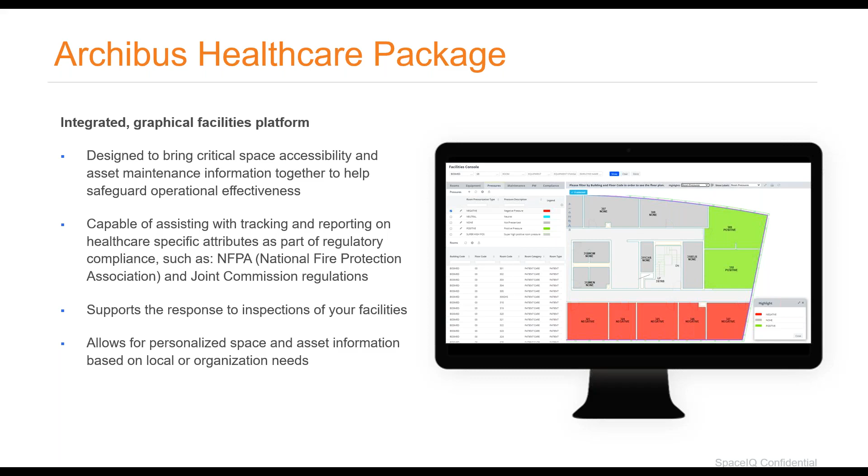What's in it for you? So bringing what I've mentioned together, this really puts into perspective the savings that we intend to deliver to the healthcare facility, and the revenue that the facility needs to maintain in order to operate well.

In terms of savings, we talk about operational efficiency or effectiveness in maintenance operations, making sure those run smoothly to maintain or reduce operational costs. I mentioned complying with regulations, saving on compliance-related costs, and lowering the risk of fines.

On the revenue side, I mentioned the use of space, making sure spaces are being utilized and patients can actually have access to the space they need when they need it, so those expensive space resources are used by patients when needed, translating to the ability to offer great patient care. If maintenance operations are handled effectively and balanced, rooms are ready when they need to be used.

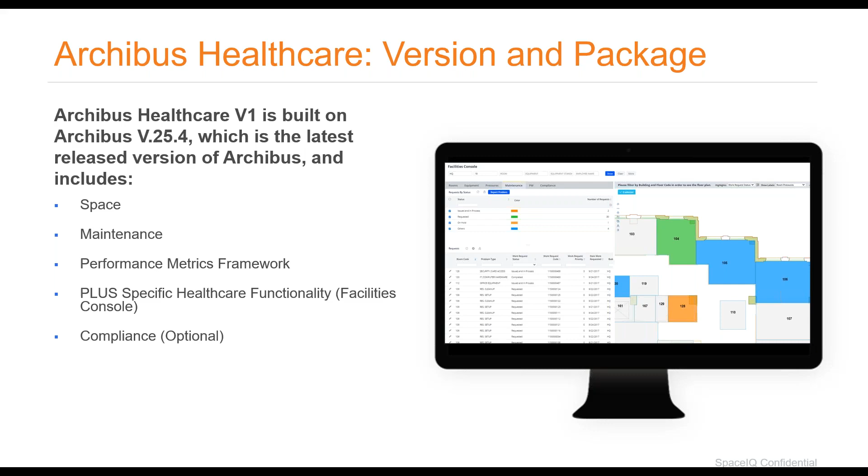I'll dive a little deeper into the facility console, where we allow the facility manager or compliance manager to track healthcare specific attributes. Just to name a few here, I won't list them all, but room pressure tends to be a very important one for compliance.

Occupancy room flag or occupancy status of rooms, secure rooms, licensed beds, I mentioned the bed count of rooms or capacity of rooms in terms of beds, biomedical waste locations, and where all that can be visualized in the healthcare facility floor plans.

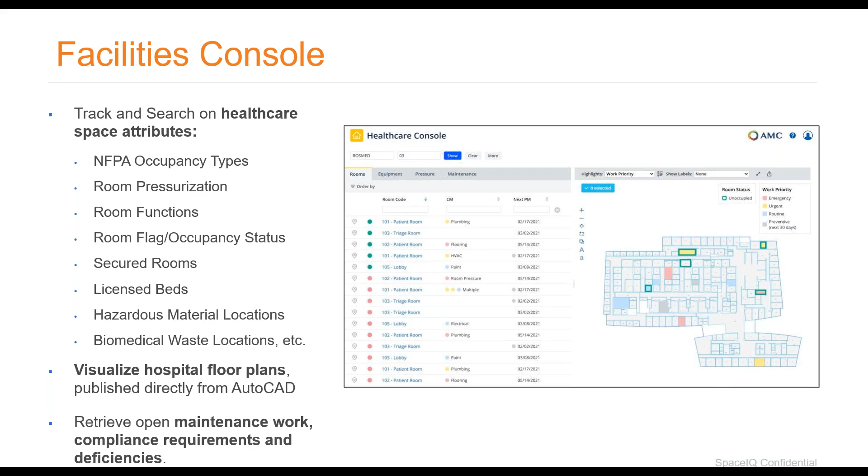Highlights are important, so visually reporting on attributes such as pressure, the National Fire Protection Association - a US-specific agency or association for fire protection, which is very important - fire zones in hospitals, room functions and occupancy types. Also being able to report or highlight corrective and preventive maintenance work.

And where deficiencies are, the ability to also display fire and safety assets on the floor plan and actually move them around, drag and drop to different locations so the visual representation reflects the reality of the situation. And of course, being able to export all of that to reports when you need to take the information with you.

Some examples of highlights, and I'll actually show this in a video. My colleague Octavian Vlad in the product group has been working very hard specifically on this package, and he's helped put together this presentation and the video I'll show in a little bit.

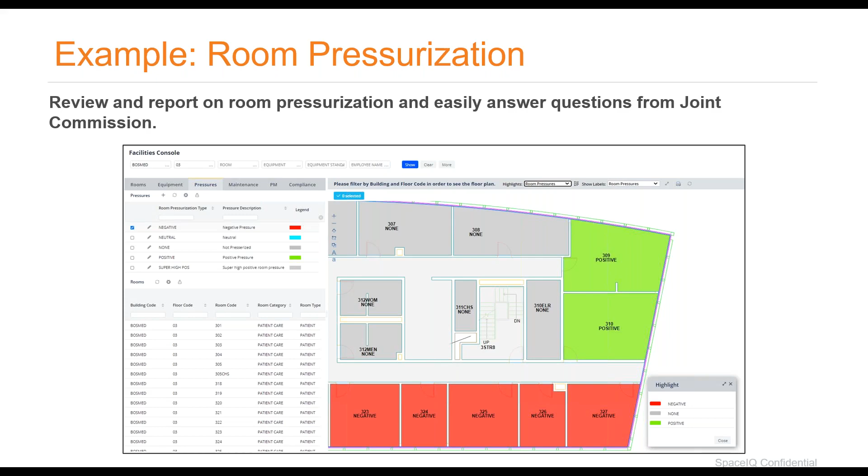Access to work, so being able to highlight and see accessible rooms and work pending in order to plan and optimize that maintenance work. I want to be able to see when I can get into rooms, plan the routes, and get the work taken care of that needs to be done for the facility to run optimally.

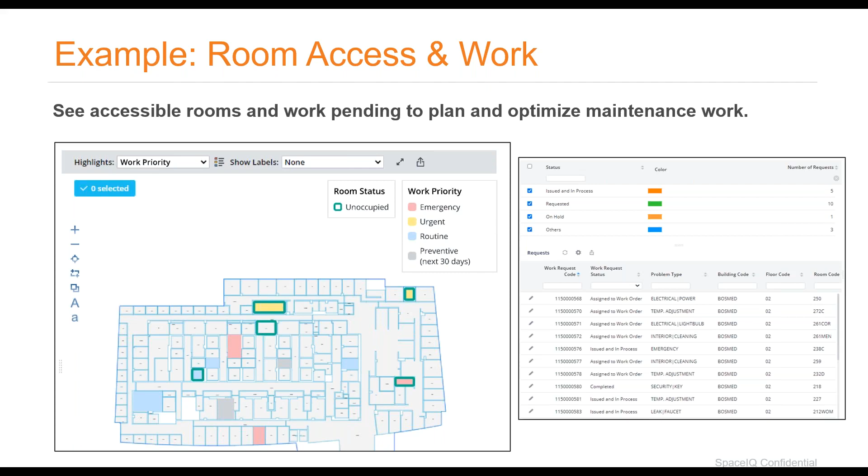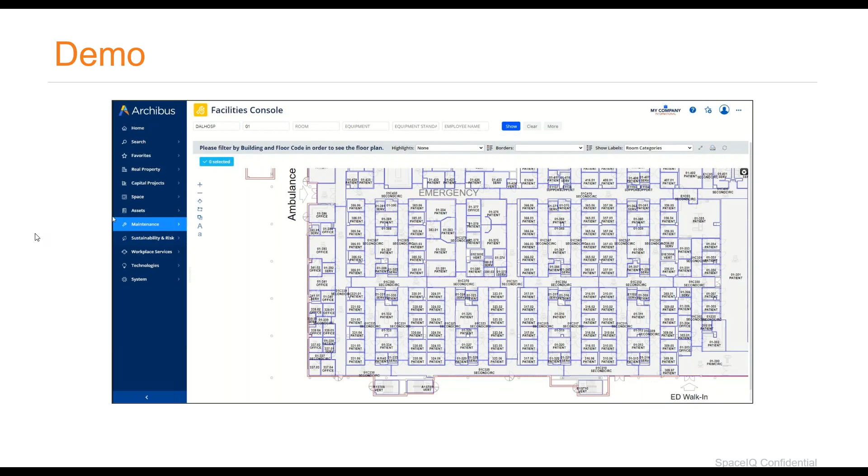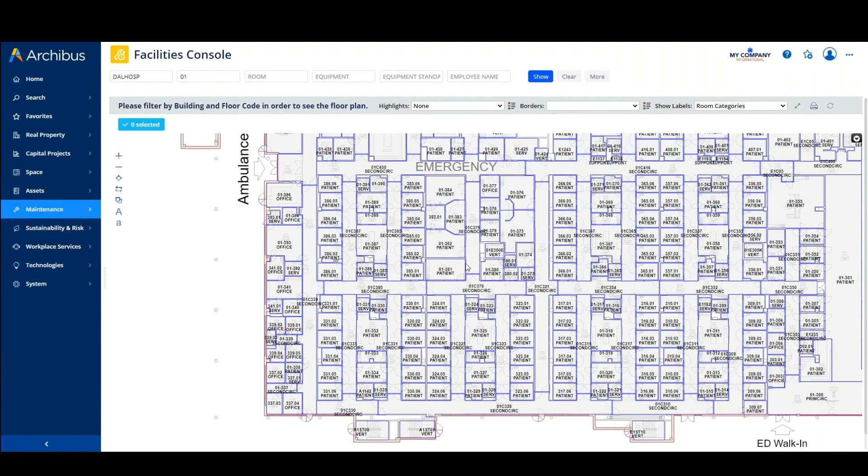With that, I'll show a brief demonstration of all of that in the facility console. So here's a view of what we're building now, and this is an example of a healthcare facility floor plan. Notice all of the healthcare-specific highlights that this can show.

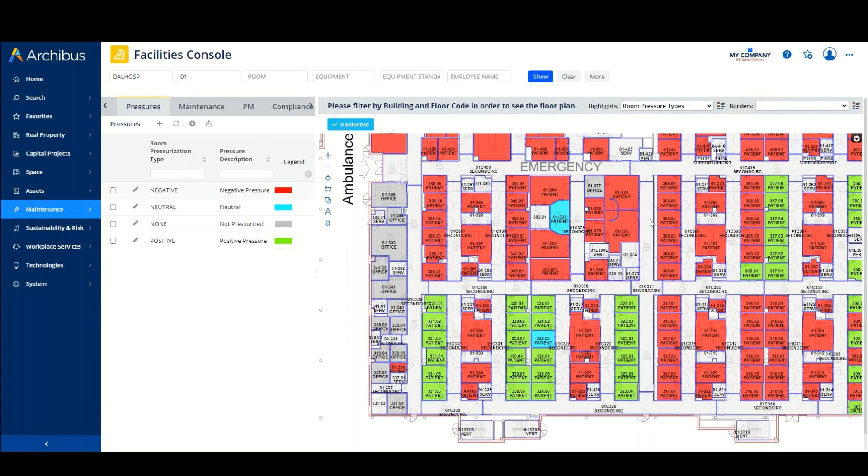For example, this is room pressure types, where you can report on negative, neutral, or positive pressure rooms, and the user can adjust the colors and presentation of that pressure. On the left-hand side, you can see the different categories that can be adjusted or expanded, along with the ability to adjust the colors of each, so that operating rooms are kept at positive pressure and other rooms, such as waiting rooms, are kept at negative pressure. It's very important to be able to maintain and even switch those pressures when appropriate.

Another big one is fire protection. Most rooms should have partial or full sprinkler coverage, and that's really important in many regulatory environments to be able to report on.

Occupancy types are again specific to the healthcare world, where we can report on healthcare, business, or ambulatory areas. I mentioned licensed beds before, so being able to define and report on the quantity of beds in each room.

And the list goes on. I think I'll take it a little bit farther - secured rooms, for example. These are all adjustable, but again, good healthcare-specific reporting for regulatory bodies.

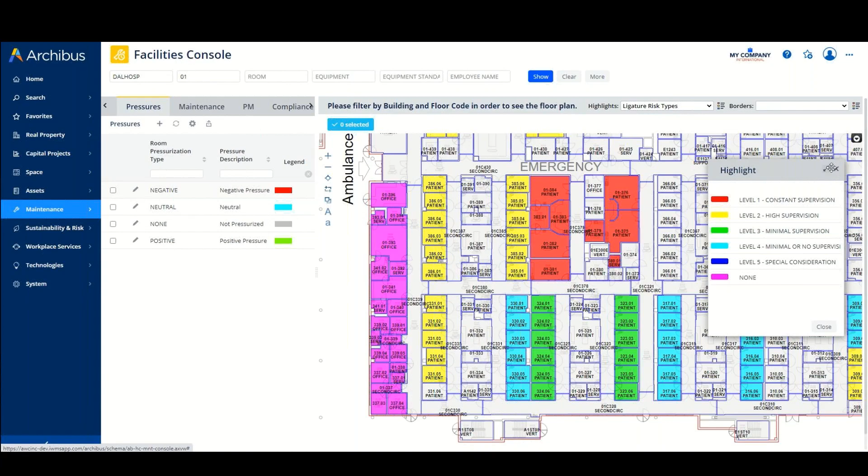I think next we'll get into zones of care as well. What we've heard in the healthcare world is that it's important to really define and report on those zones, whether it's entities published on the floor plan that we can show by turning the asset background layers on and off, or even defining those rooms in the zones. There are ways that Archibus can help manage and report on those zones of care.

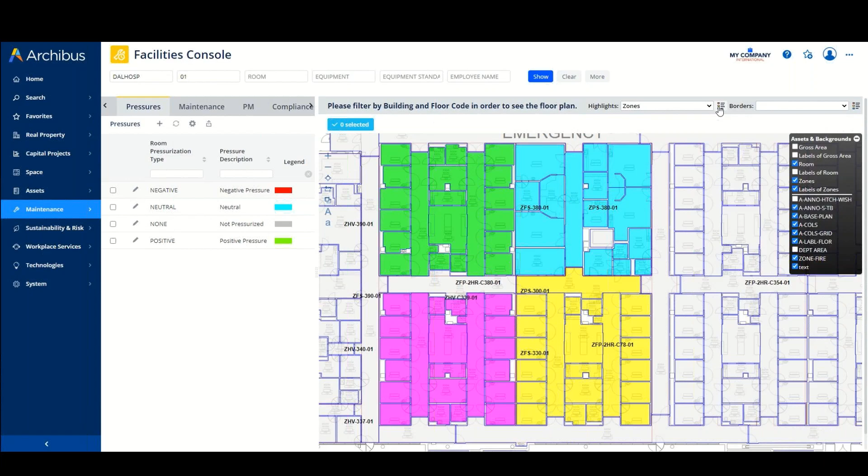I believe next we'll go into some of the tabs along the left-hand portion that bring the space side together with the maintenance side. So here on the maintenance tab, you have the ability to see what's going on the floor with respect to open work.

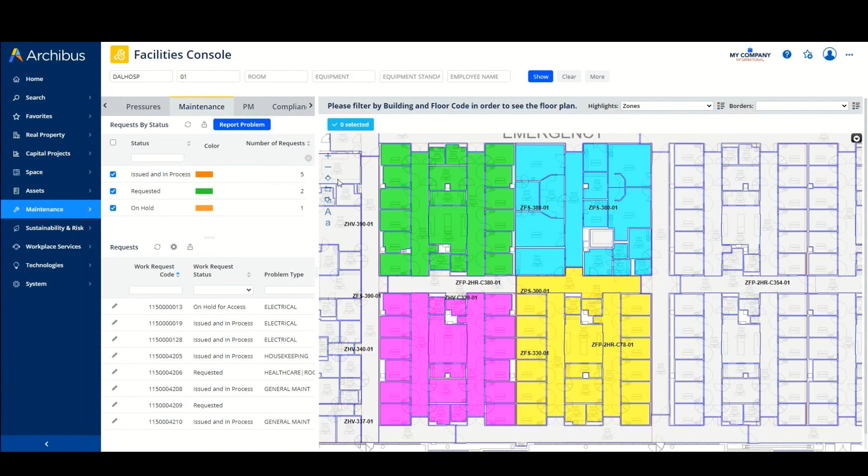Here the highlights can match what we're seeing in terms of work that's open or being performed on the floor. So here we have some work that's issued, some work that's on hold, and the locations of that work.

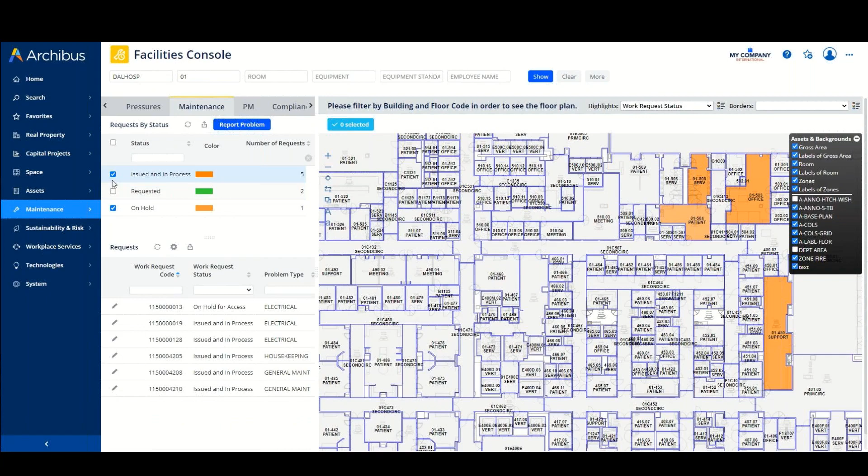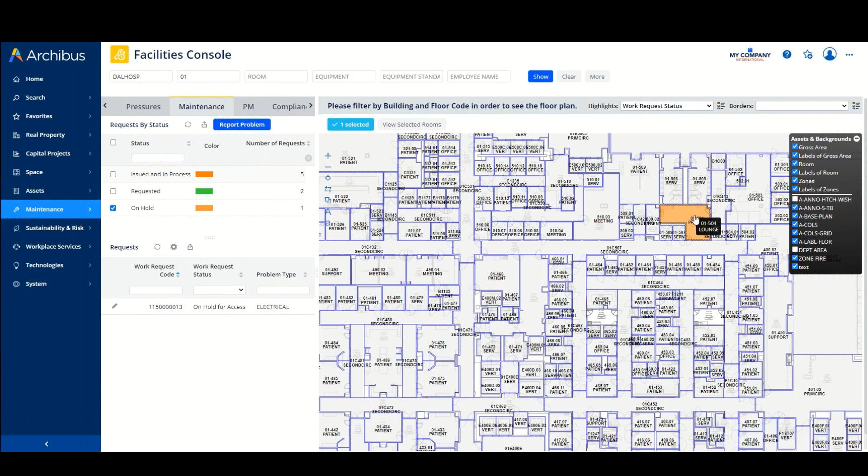As you adjust, perhaps on the left-hand side or the right-hand side, the highlights will accommodate. So if you want to just see, for example, work that's on hold, you can zone in on that work and see the details here.

We've also expanded the ability to see room-specific detail - the maintenance that's in that room, pressure attributes, for example, and any compliance deficiencies.

So all of that is available in different ways, but bringing that information together comes back to the point of being able to optimize those maintenance operations, visually seeing what's going on, enabling compliance with regulations at the country, region, or local level, and tracking and making best use of the space to make sure the facility is able to optimally offer effective patient care.

So that's what we've been working on. We are aiming to have this generally available to users in June of this year. We're working hard on rounding out the solution, making it full-featured and tested for delivery in June.

And certainly we don't stop at version 1. We will continue making it even better with considerations for future versions, such as additional life and safety floor plan highlights, portfolio performance overview for healthcare organizations, more management in terms of the holistic asset picture, assets and systems, and templates for maintenance checklists or compliance. Lots of ways we can help with the burden of data delivery or data management, with templates for standard regulations that we can put into the system to make getting up and running even easier.